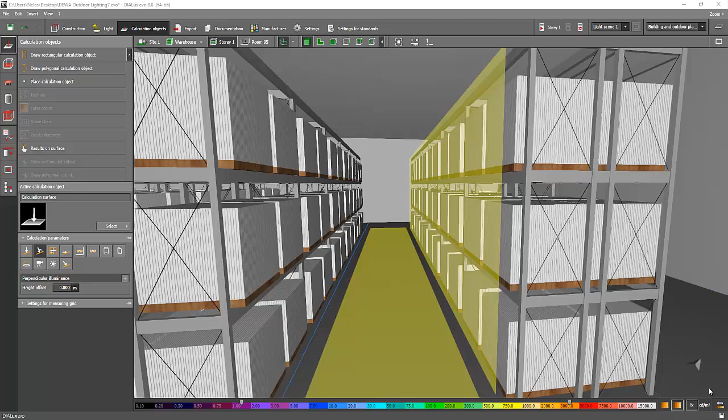Okay, so let's select now our fitting. For this example, I will just select the Thorn brand. So I'll go to the Thorn website, select the product, go to the indoor thumbnail, then to industrial lighting, and I will select one of our high bays. We have different types here, but I will just use this one as an example, and let's see if it has an IES file.

Okay, so it has an IES file, so I'll just select, for example, the 8000 lumen small one with 840, the 4000 Kelvin with 80 CRI, and I'll just use this very wide beam. Well, I'll just go for the wide beam only. So just select the DIALux tab and say save, and then okay.

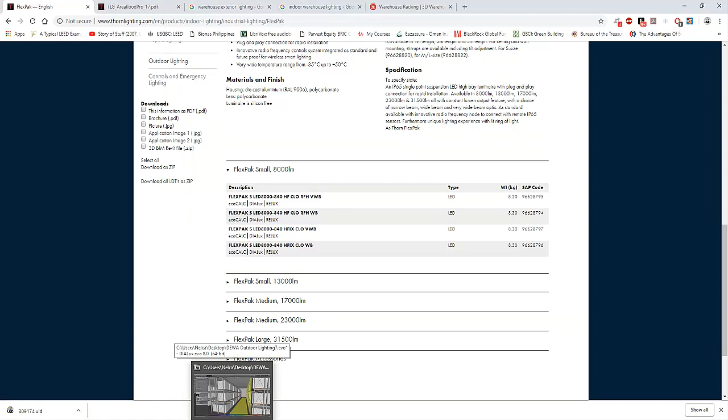So I'll just use this one as an example, and let's see if it will comply with our requirements, which is 150 lux on the horizontal and 100 lux on the vertical. Some clients prefer to have at least 200 lux on the vertical, but for this example, we'll just go for 100 lux. Some warehouses ask for more, like 300 to 400 lux. It depends on the sizes of the boxes and the complexity of the racking system. Because this warehouse has very simple boxes and racks, I'll just say 150 lux on horizontal and 100 lux on the vertical.

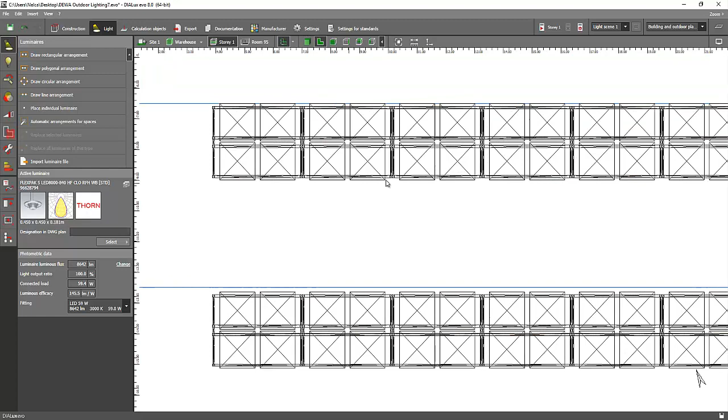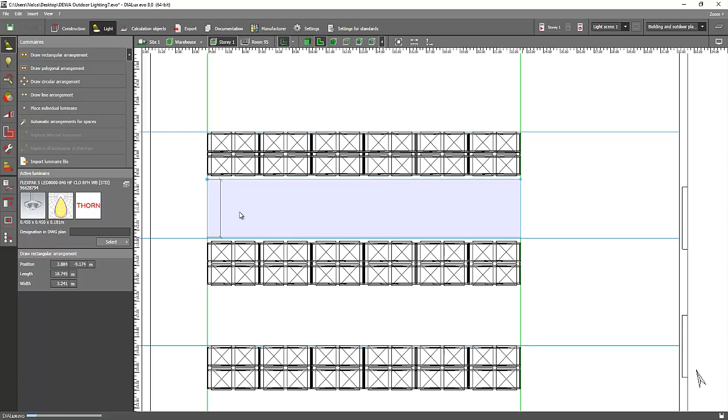So I'll go now to the plan view, and I will arrange my high bays. I'll go for the draw rectangular arrangement, just to make sure that my luminaire is in the middle. So I'll go like this, and I will try to arrange it, say, 8 meters apart, and the mounting height will be 9 meters because my building height is 10 meters. So I'll just drop it 1 meter from the ceiling. So let's go and check that one.

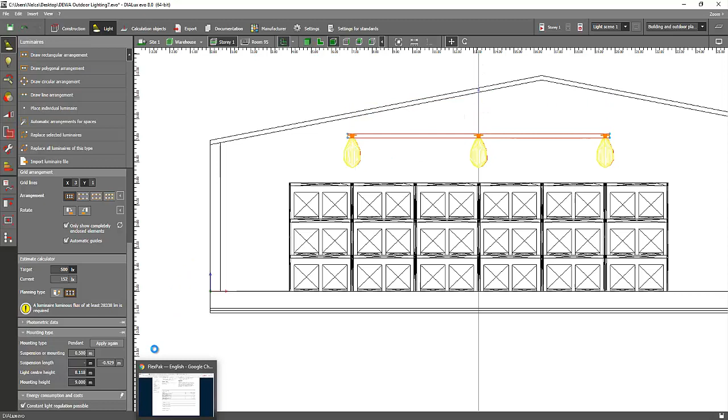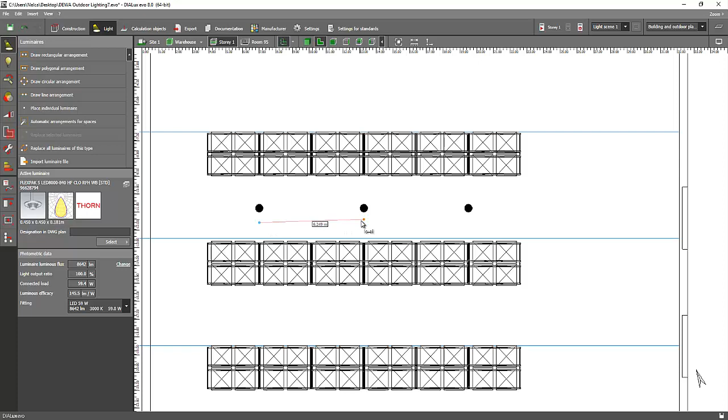Okay, let's measure my building first. Oh, okay, so it's only 7 meters. So I'll say 7 meters mounting height from the ground. Okay, so I have my arrangement now, and the spacing of my high bays is, let's say, 6 meters. You can make it precise later on if you like. So let's check if it's okay or not. I'll go to the fast calculation just to check if we comply or not. So let's go now and calculate.

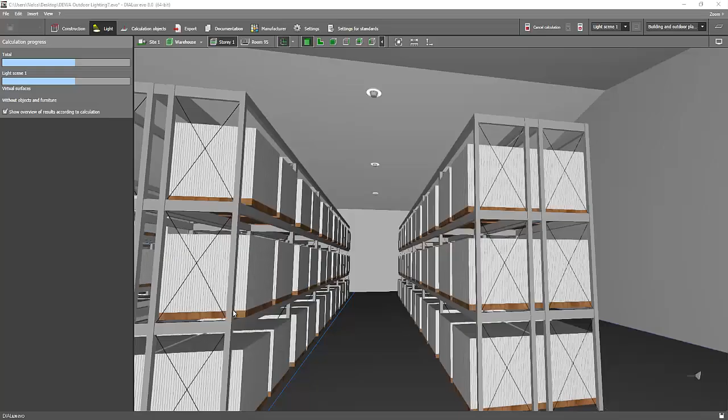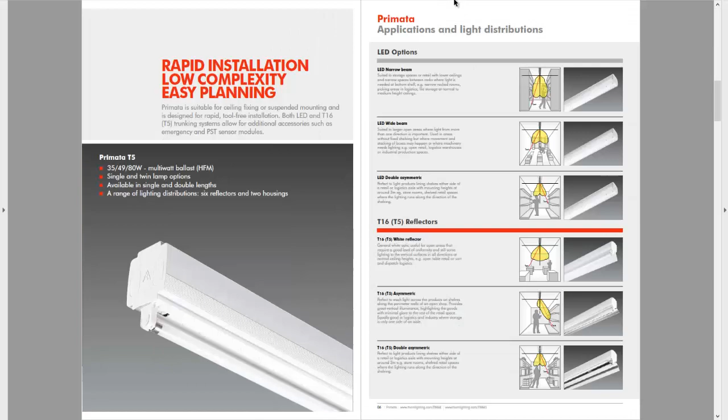Alright, while we are waiting for the calculation to finish, I'll go to another brochure that you can download later on, called the Thorn Primata. You can use this Primata for a small storage room or for a warehouse application. The one I used in our design is a high bay, but some clients prefer linear fluorescent or linear LED. You can see the example here, especially for a low mounting warehouse or stock room. And you can see the different applications here.

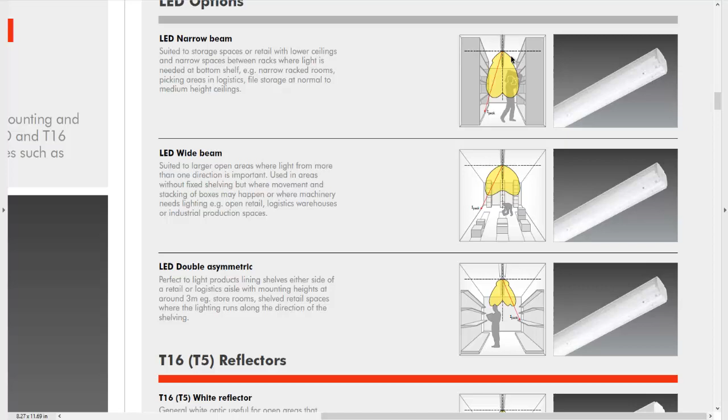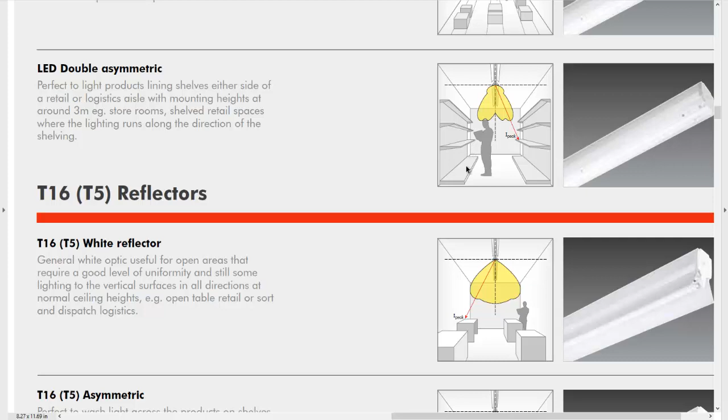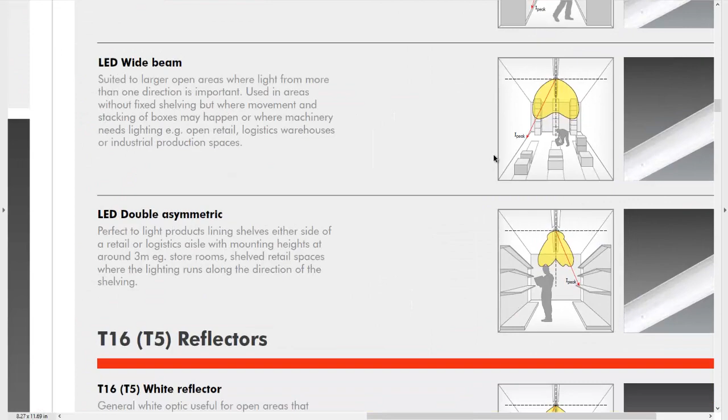For example, for a narrow area, you can select the perfect optics for a narrow area. For a wide area, you can have the wide beam. And if you have shelving, like most stock rooms for a retail shop with open shelves, you can have this double asymmetric. You can also use this Primata for a retail shop or supermarket, not only for warehouses and stock rooms, with LED or fluorescent lamps. Okay, let's see if our calculation is finished.

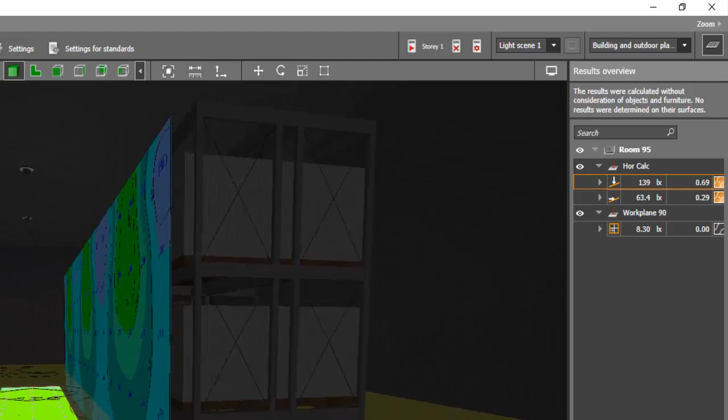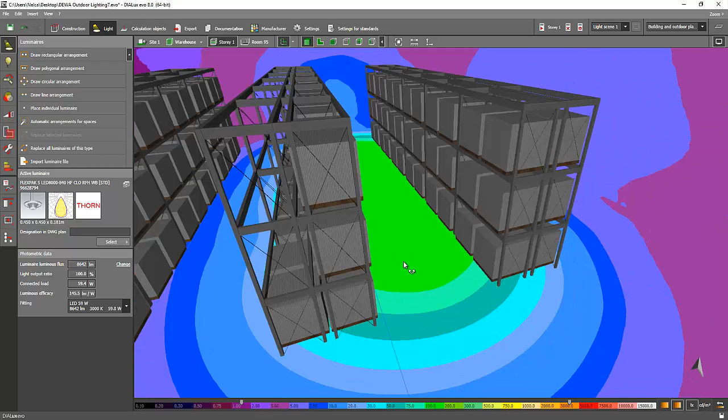Alright, so we're done, and we can see that we achieved 139 lux on the horizontal, which is less than our requirement of 150, so we need more. And on the vertical we only have 63, and I told you we should have at least 100 lux on the vertical. With that you can analyze, let's go to the false color, that there is a gap. Okay, I did not calculate the object. Alright, let's go here. There is a dark gap here, and this purple one is only 20 lux.

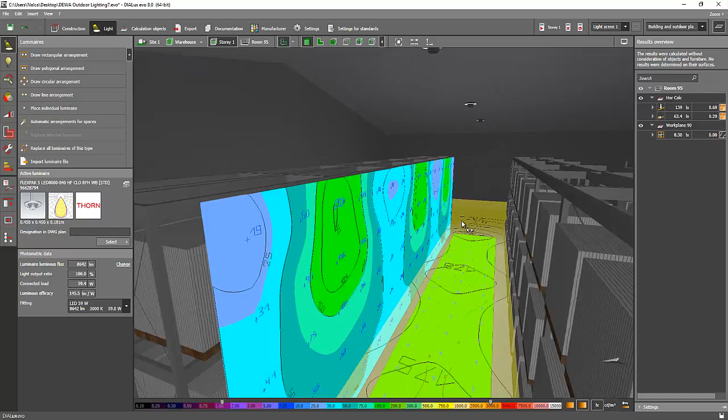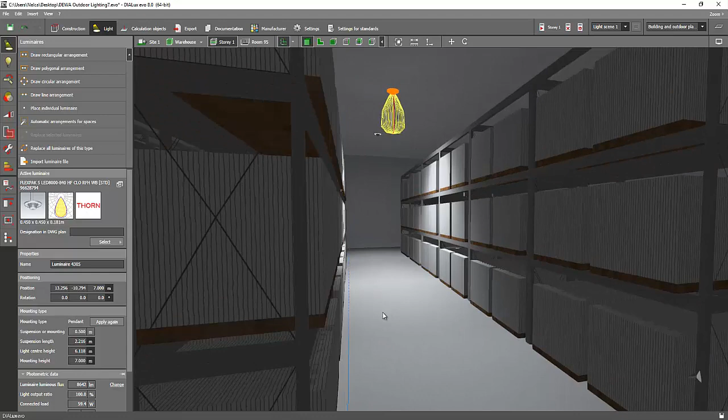So we need a proper spacing for this high bay. I think we can go for a very wide flood if it's really necessary to have uniform vertical illumination. My spacing is 6 meters. We can go for 5 meter spacing and select different optics if necessary, because we did not achieve the required lux level for this area. Alright, so you can move, click, check and apply.